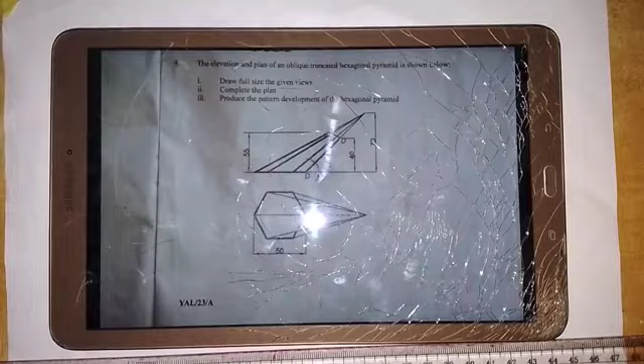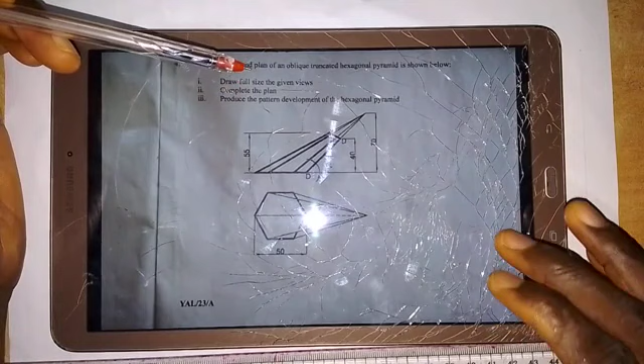Here is 2023 NECO question, and it happens to be question 4. I'm going to solve this problem. We have here that the elevation and plan of an oblique truncated hexagonal pyramid is shown below, and we have to draw full size the given views, the complete plan, and also produce the pattern development of the hexagonal pyramid. So that is the question given to us.

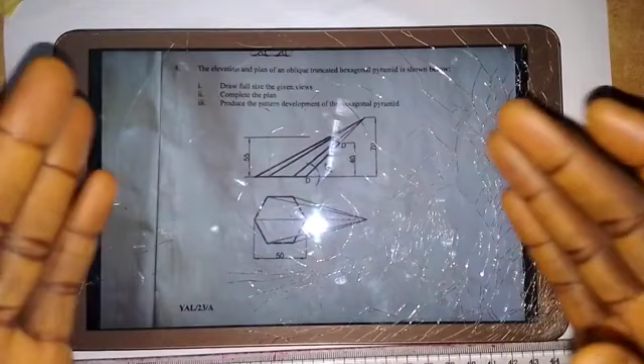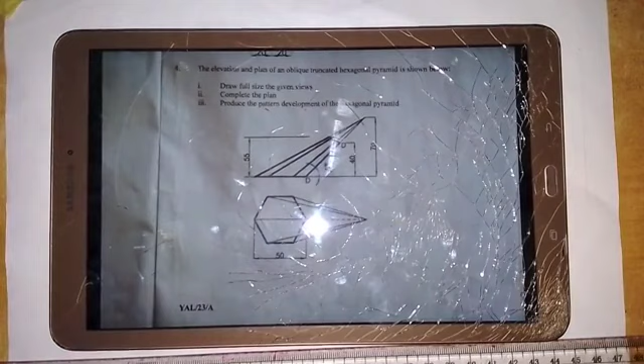So what we are going to do now is to replicate the given views, as we are told in question 1 that we have to draw full size the given views. So I'm going to show you how to go about the construction of the given views, and let's talk about the dimensions of these views as we are given here.

So as we have here in the plan, the distance across corners for the hexagonal base of the pyramid is 50 millimeters, and for the front elevation this line here is inclined at an angle 45 to the horizontal. The distance from this point to this point here is 40 millimeters, the height here is 70 millimeters, and the distance of this point from the base is 55 millimeters. So we are going to make use of all these dimensions to answer the given question.

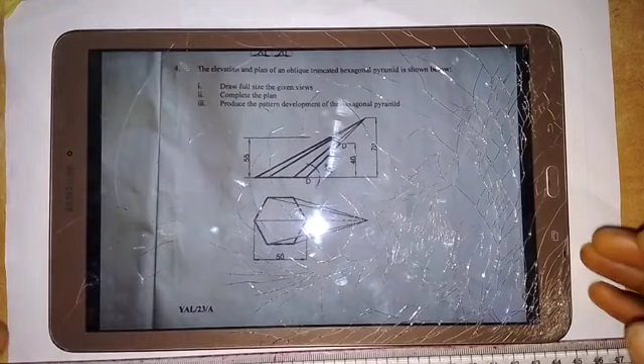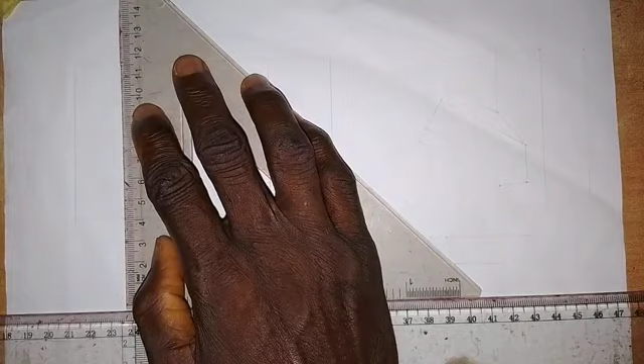So let's start. The first thing that we need to do is to produce the hexagon as we are given in the question. So we need to draw a vertical center line. Okay, I don't think I need that for now. So let me draw the horizontal center line for us to construct the hexagon. Then I will draw a short vertical center line, so I don't have to draw the whole of the vertical center line. So I'll just take it like this.

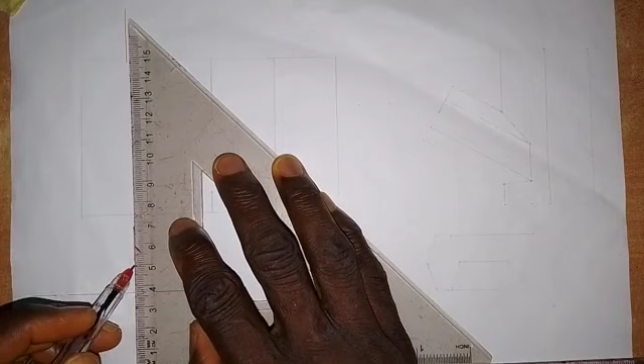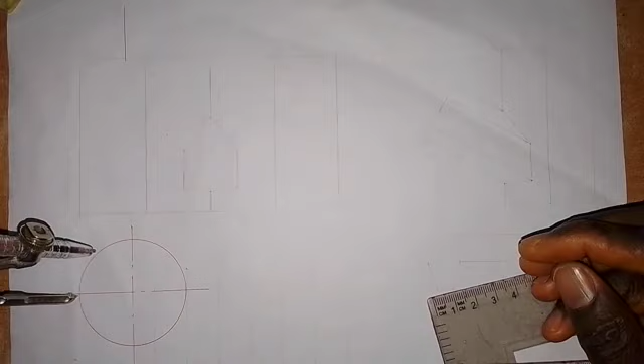Then I'm going to take my compass and take a measurement of 25 millimeters, which is half of 50, the distance across corners as we are told in the question. Then I'm going to draw a circle like this, and with the radius that I used to construct the circle, I put the midpoint at this point to make an arc here, and I will make an arc down here and here also. Then we go on and produce the hexagon as we are given in the question.

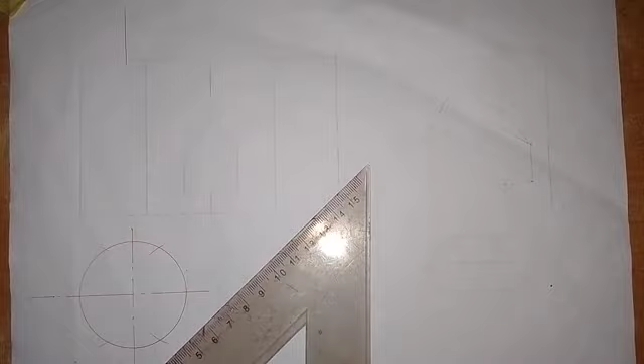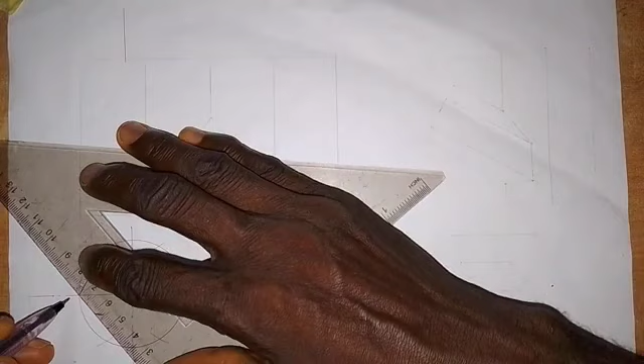So I'm going to connect this point together with this, and this point also will be connected together, and I'll connect this point together, like this. And I'll also connect this point together. So as you see the hexagon in the given views, that's how we are going to produce it. Don't forget that this part is drawn with short dashes line, meaning that part is hidden from us when we are viewing the object from the top down. So we draw it with short dashes line as you see it in the question.

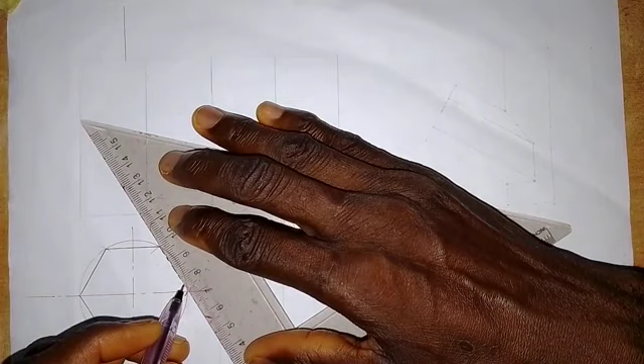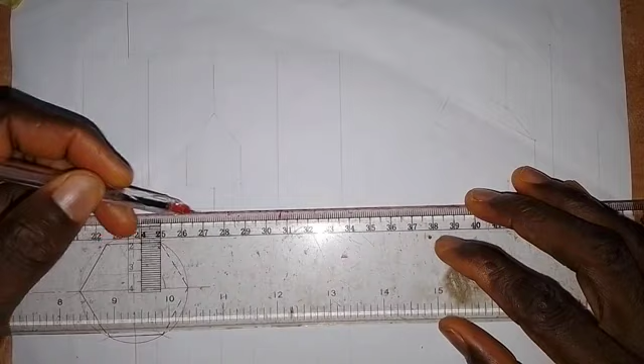Okay, having drawn the hexagon, the next thing that we need to do is come up a little bit. Then we draw a horizontal line like this. That's why I said we don't have to draw the whole of the vertical center line.

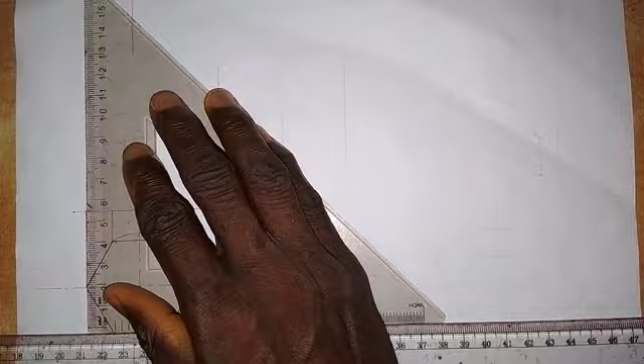So the next thing that I'm going to do is to draw a vertical line from this point to touch the horizontal line that I just drew. From here also I will draw a vertical line to touch the horizontal line. So from this point I will draw a vertical line, and also from this point we draw a vertical line.

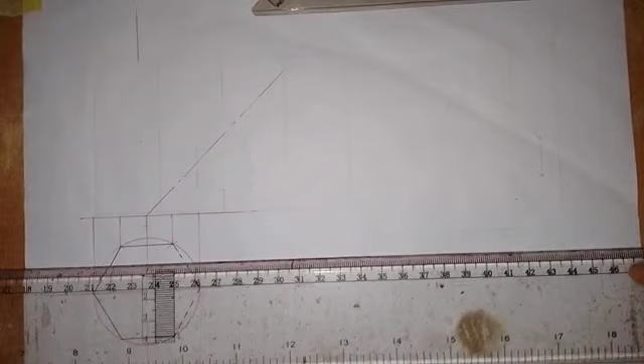Alright, so going on, I need to take my 45-degree set square. Then I'm going to draw this line as a center line at 45 degrees. Though this center line is not shown in the question, I need it. So I will extend this horizontal line a bit.

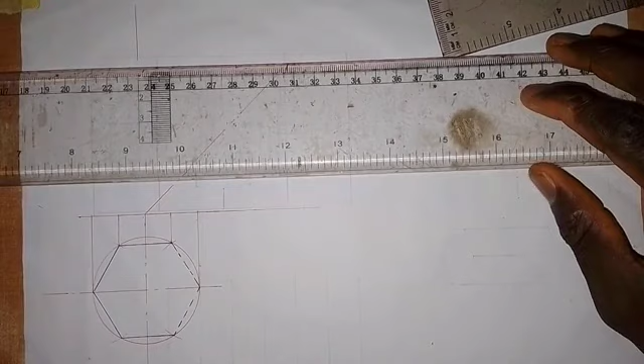Then I'm going to take a measurement. So I'll draw a vertical line here from this point, just to make sure that I can take a measurement of 70 millimeters. This is 70, so I'll just draw a horizontal line here like this, making sure that this line touches the horizontal line. Okay, so for the height of the pyramid, I've done that.

So the next thing that I'm going to do is connect. Since this line is at 45 degrees, any line that I draw from here will also be at an angle of 45 degrees to this line. So this line also, by the time I draw it, is at 45 degrees to the horizontal. And if I draw this one from here, it will be at 45 degrees. And if I draw from here also, it will be at 45 degrees. Okay, so I've drawn the lines.

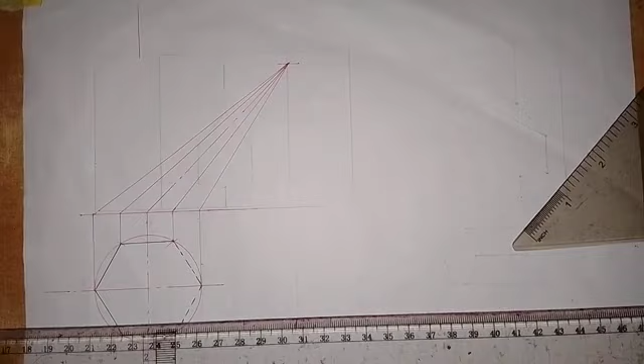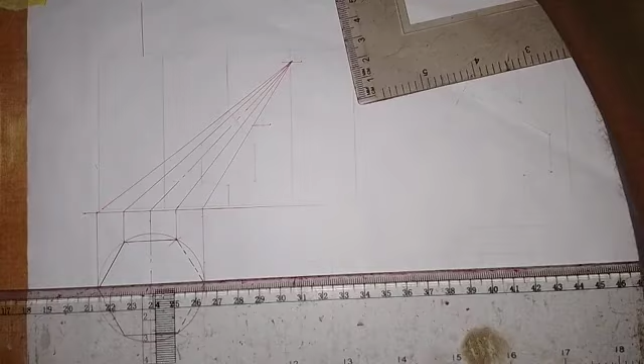Another thing that we need to do here is to take a measurement of 40 millimeters on this side. So 40 millimeters from here up. So this is 40 millimeters. All I need to do is draw a horizontal line from here to touch this side. And we are told that we have to take a measurement of 55 millimeters from here. So this is 55 millimeters. Then I will draw a horizontal line.

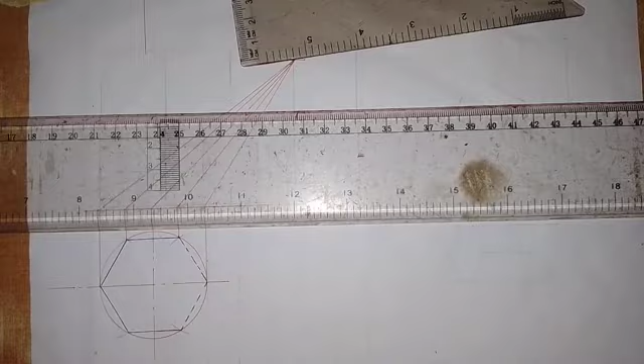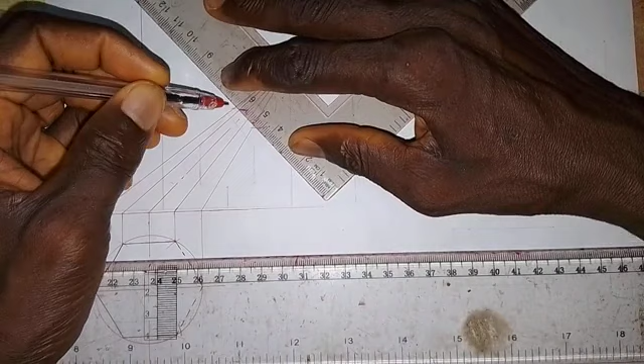But I just don't know why they put that 55 millimeters there. Okay, all right, yeah, it's correct. So that 55 millimeters is also needed. So I just mark it here on the object. Then I'm going to connect this together with a thick line, like this. So this part has been cut off. So this is a truncated oblique hexagonal pyramid.

So all I need to do now is to make this line a thick line. Then I will make this line also a thick line. So this line, we made a thick line. The middle one, I don't need to make it a thick line. This line also will be a thick line. Then the base, we also make it thick like this. So we have drawn the front elevation.

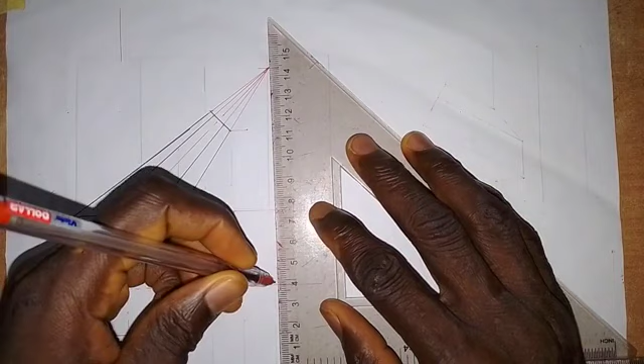Now we are going to draw the complete plan. So I need to extend this horizontal center line like this. Okay. So to draw the complete plan, I'm going to draw a vertical line from this point. A vertical line from here, but it's not compulsory. I can just mark it here. So that is this point here in the plan.

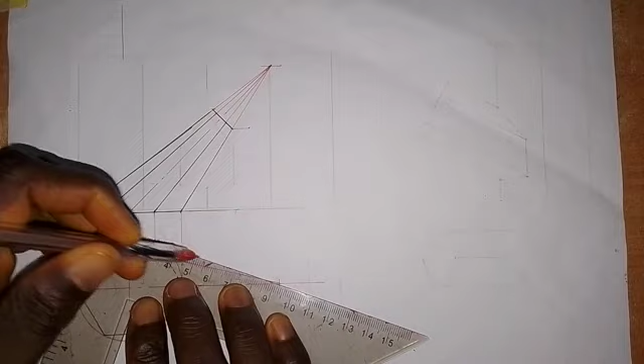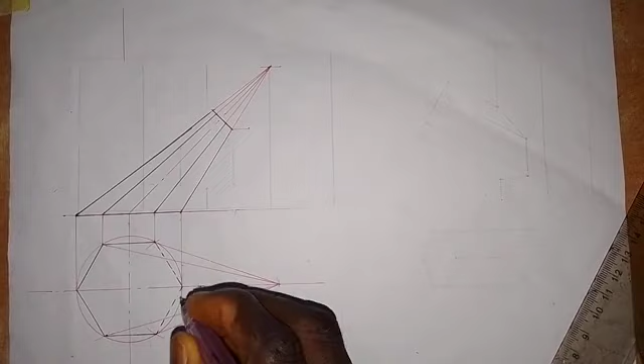So then I'm going to connect this point together with this, and I will also connect this point together with this. This point also will be connected together with this, and I will also connect this point together with this. Before I continue, I'm going to number these points. So if this is point 1, this is 2, this is 3, here is 4, this is 5, and this is 6.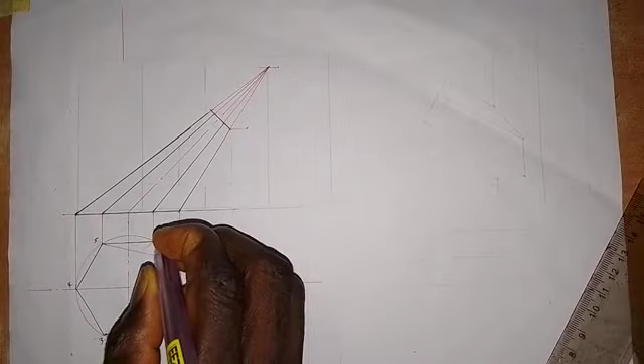So for these lines, I'll call this 1 prime. This is 2 prime 6 prime. Then this is 3 prime 5 prime. Then we have 4 prime.

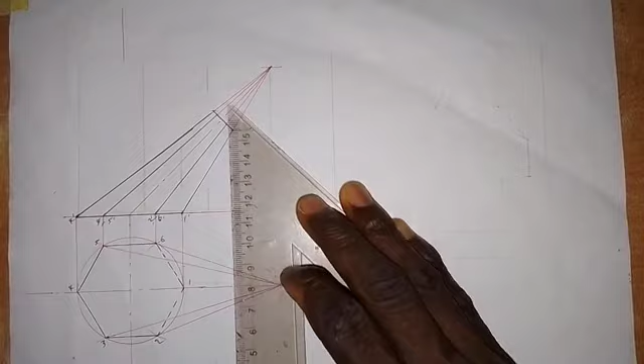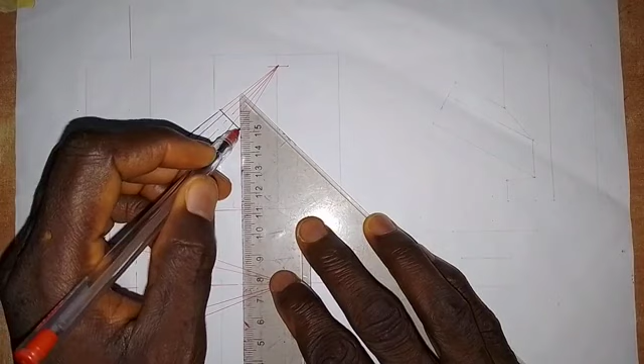Okay, so now for line 1, I'm going to draw a vertical line from this point to touch line 1 here. For the complete plan, because we are going to have a raw surface here, and they want us to have it in the plan, we need to draw a vertical line from this point down to the plan. So it touches line 1 at this point. I will take note of this point here. So this is point 1 in the plan. So then we have 2, 6.

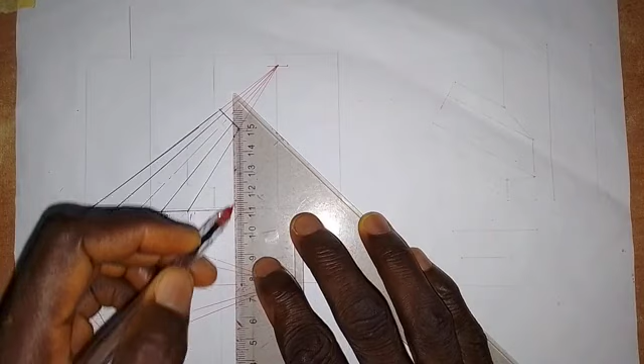So I need to draw a vertical line. So from here down, so it touches 2 at this point. So we drew a line from point 2. So it touches 2 at this point and touches 6 at this point.

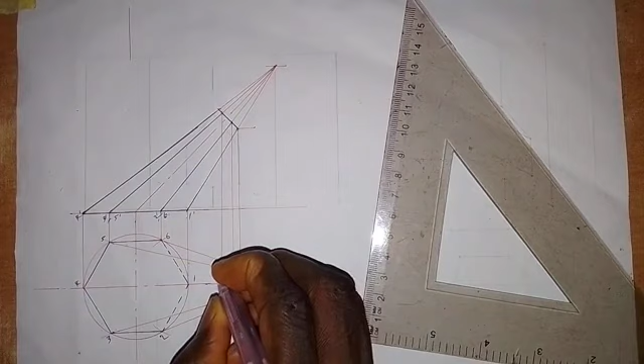Then I will draw from this line, which contains 3 and 5. So draw a vertical line like this. So it touches 3 at this point and touches 5 at this point. The last one is 4. So drawing a vertical line from this point down to the plan. So it touches 4 at this point.

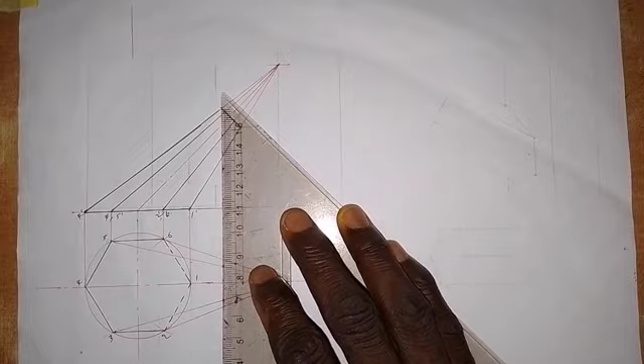So this is okay, sorry. Okay, so it touches 4 at this point. So this is point 4. So all these points, I'm going to connect them together. So if I connect this together like this, and connect this together. So I connect this together with this. So this one goes with this, and this goes with this.

So what I need to do now is to make sure I produce hatching lines on this surface. So just to hatch it like this. So we do that with a 45-degree set square. Alright, so then I need to make this line a thick line from here to here. And this line will also be a thick line from here to here.

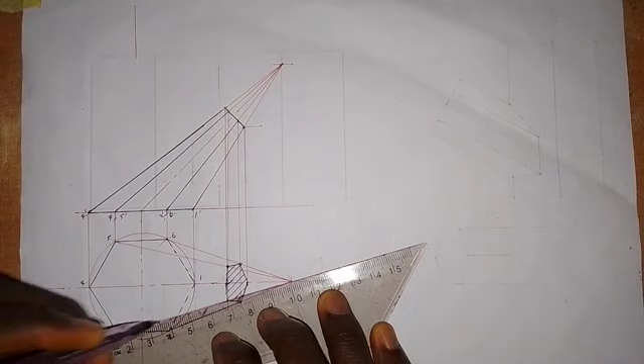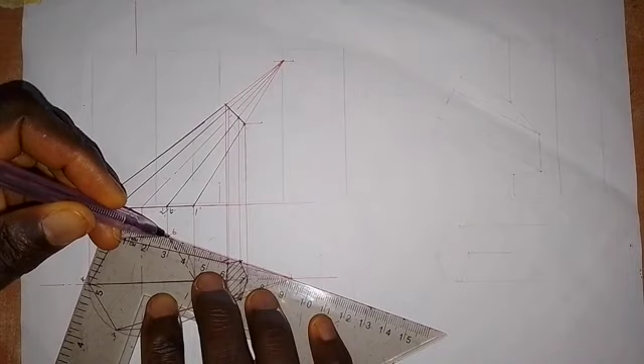And for this line, it will be a thick line. Okay, so this line also will be made a thick line. And then this last one will be a thick line. So this is the complete plan as we are instructed to do it. So the next thing that we are going to do now is to draw the surface development.

So we need to find the true length, but for this I'm not going to be working on that. So I'll just take the distance from here. So the apex of the pyramid, let's call it point O. Okay, so this is point O, that is the apex of the pyramid. So what I need to do now is to take the distance from there.

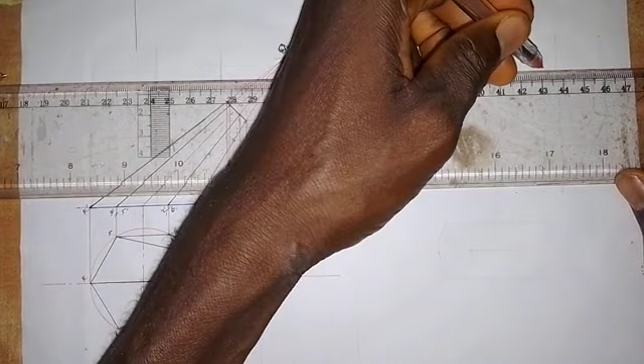Before that, I will need to draw a horizontal line. So let me come up here. So if I draw a horizontal line from here to here, this point will be point O as we have it. That is the apex of the pyramid. So as we have it there, what we need to do now is to take our compass.

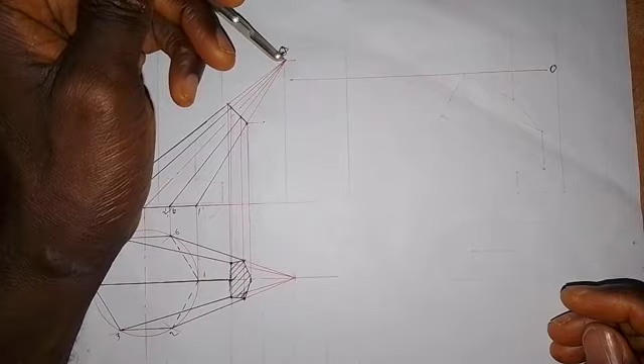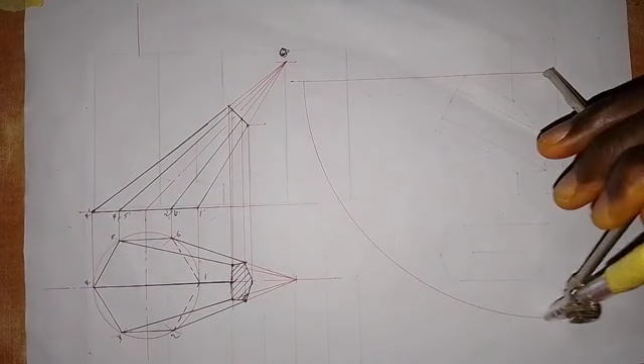So take the distance from here, from this point. So this is the longest one. So you need to take this one. This is the one that you have to take. Distance from here to here. Then put the pinpoint at O here, and you draw an arc like this. So draw an arc like this.

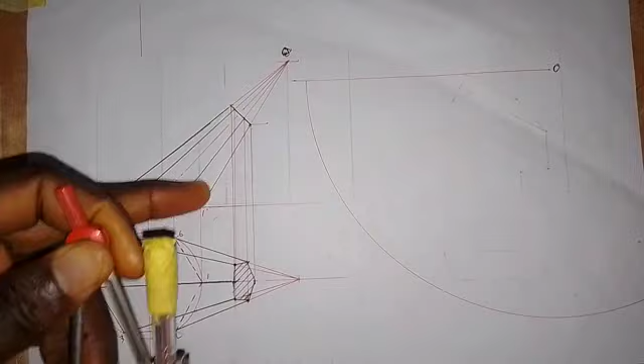Okay, so having drawn that, what they said that we should do is that we should open from here. They call it point DD. So this is point D, and this is also point D, which is the seam. So we have to cut it from here and spread it. Before we go on with that, if you look at point DD, it is point 1. So we have 1 here.

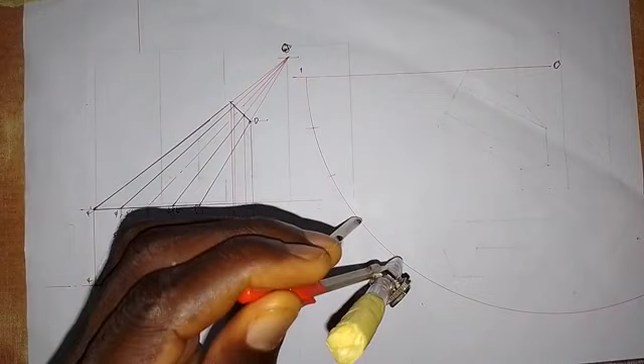So then we are going to take the length of side of the hexagon, so distance from here to here, like this. So we put it at this point and make an arc, so this is 1. We make an arc next, so this is 2. Then we make an arc next here, this is 3. Then make an arc here, this is 4. Then here we have 5.

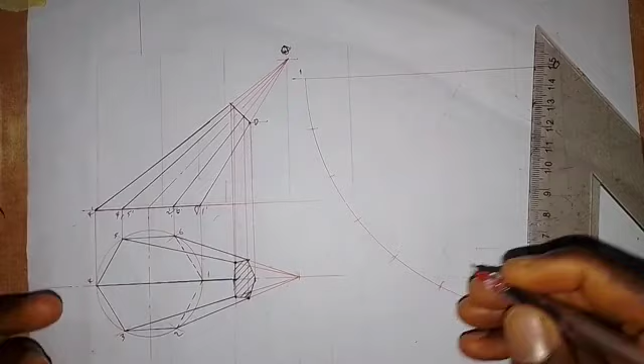Then the last one is this, which is 6. Okay, so we have all these points. So we are going to join these points together. So we number them. So we have 1. So this point will be 1. Then after that we have 2, 6. This is 2 and this is 6. So after that we have 3. Then we have 5. Then 4 is in the middle.

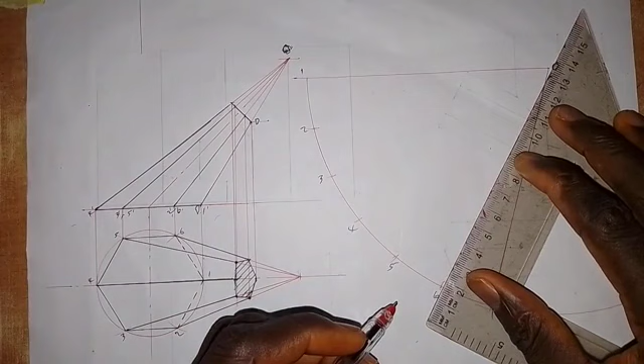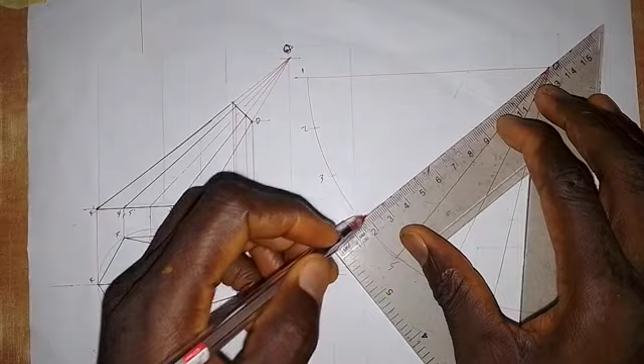So having done this, now we are going to join this point together with the apex. Then we also join this point together with the apex. Okay, so we join this together with the apex. So 4 will be joined together with the apex of the pyramid. Then we also join 5 together with the apex of the pyramid. Then 2, we join it together with the apex of the pyramid, like this.

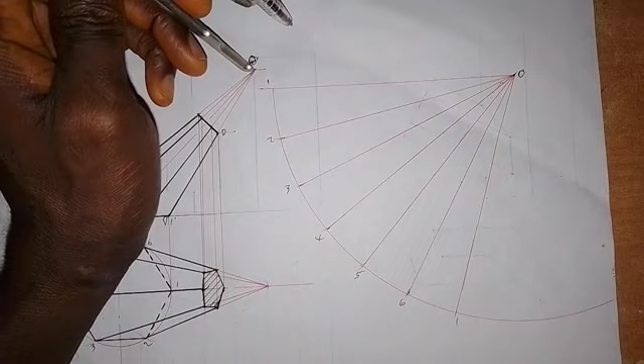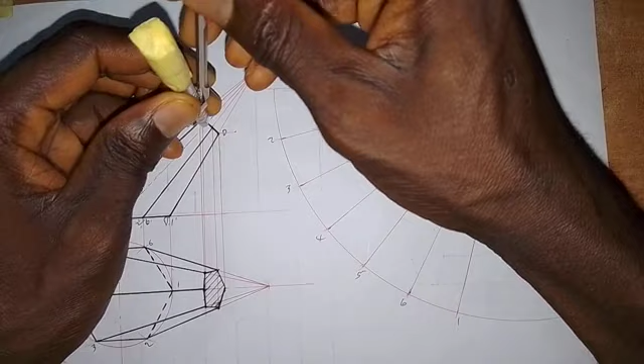Alright, so now the next thing that we are going to do is to take a compass, put it at this point O here, and extend to this point on 1. Then we bring it here to point O and we make an arc here on 1. Then from this point to point 2, 6 on this line, so we put it at this point, make an arc here on 2, make an arc here on 6.

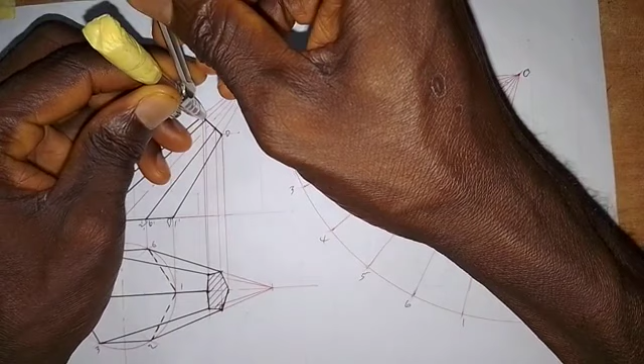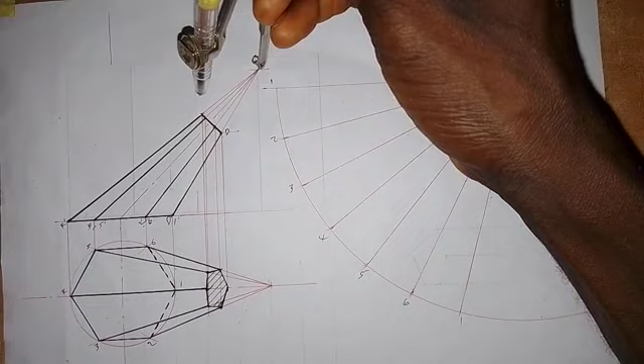Then from point O again to 3, 5, which is this point. So we put it at this point, make an arc on 3, make an arc on 5. Then the last one is point 4, so we put it at this point and make an arc on 4. Okay, so those points, let's leave that for now. So now we come from here.

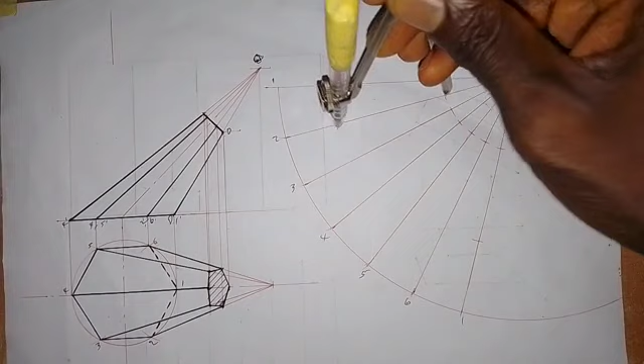So I just take it from this point to point 1 here. So from here to here, put it at this point where we have the arc that we have taken a distance. So that's on 1. I will also put it here, to get it on 1. Then I put it at this point and extend to this point for 2, 6. So here I will put it on 2. Then I make an arc here, put it on 6, this point. So I'm not putting it at point O, so take note of that. I'm taking it on these arcs that we have produced already.

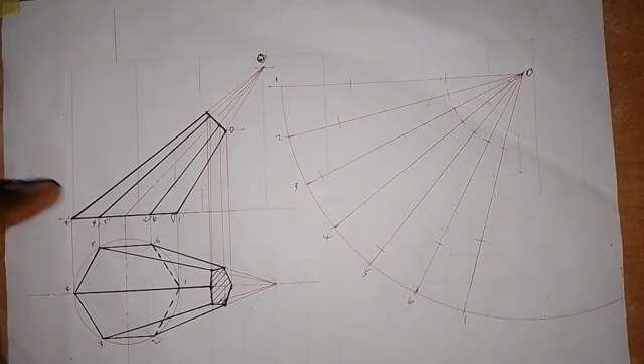Then for 3 and 5, putting at this point, I will extend to this point for 3 and 5. Then I put it at 3 here, make an arc here. Then I'll put it at 5, make an arc here. So for 4, I don't have to take that again, it's going to end at this point, so I don't have to do that again.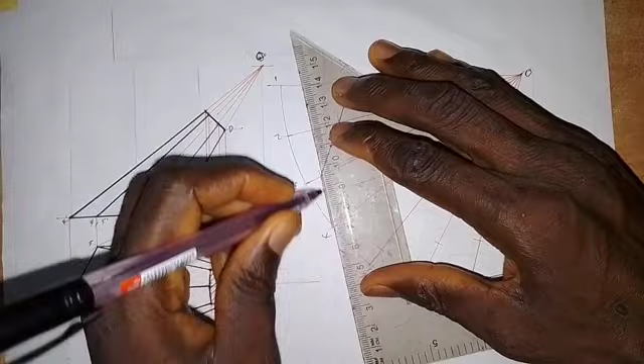So what I need to do now is to join these points together. So we connect this point together like this. Then this point, we connect it together with this point. Okay, then we connect this point together with 4. So we do the same thing on this side. Then we connect this together, and this also will be connected together.

Then we come up here, so it should be a straight line, so don't try to use your French curve to join them together. This is a pyramid, it is not a cone. So don't think because it looks like something you can give a curve, then you take your French curve to join them together. That is not correct. So we also join this together and we join this together.

So then I will make this line from here to here a thick line. So this line, we made a thick line from here to here. I will also make this line a thick line.

Alright, so this is how the surface development will look. So we have done what we are required to do, as we were told that we should draw the given views, which we did. We have drawn the complete plan and surface development of the hexagonal oblique pyramid. So all you need to do is to practice. When you practice, you become a master at it.